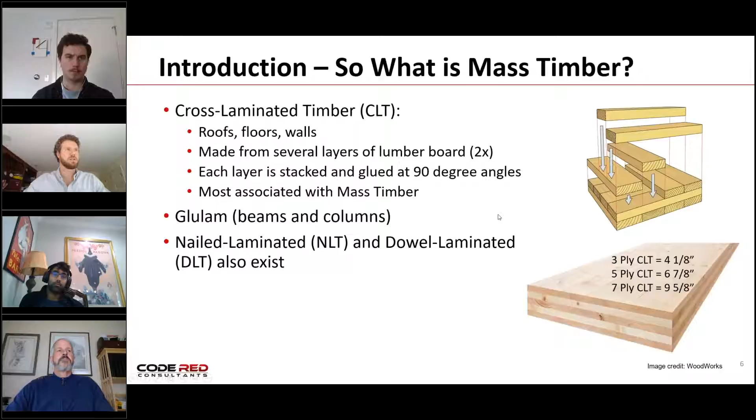NLT floors, I'll mention for the UMass project, but otherwise we're seeing those few and far between, and I haven't seen DLT really used on any project so far.

So sort of in chronological order, and I'll go along with some different construction types. A fun place to start off as an example, not that this is a Code Red project, and it's now been built for the better part of 5 years. I hope some of you have had a chance to go see it, because they do public tours. COVID, I'm not sure exactly what they're doing with COVID. I saw it a couple of years ago, but the Olver building out at UMass, which houses the university's building and construction department, which is pretty cool for them, is a really great building.

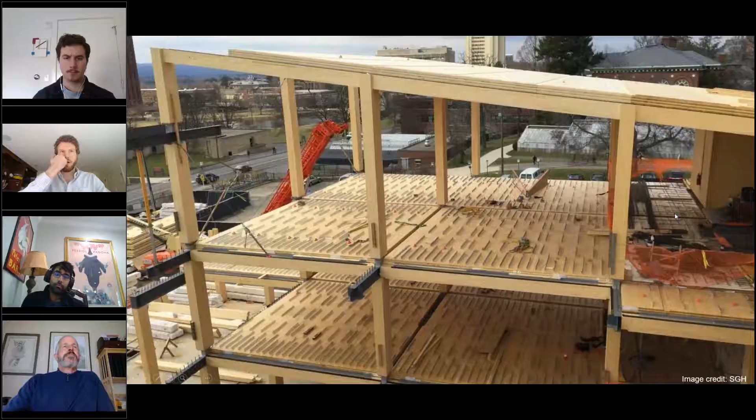This was actually permitted under the 8th edition, and so this has been around for a while. They had to get some specific approvals since they were way ahead of the curve. But it gets called the crown jewel of New England mass timber movement a lot, because it's a pretty spectacular building, and they did a great job with it. You may already know a good amount about it.

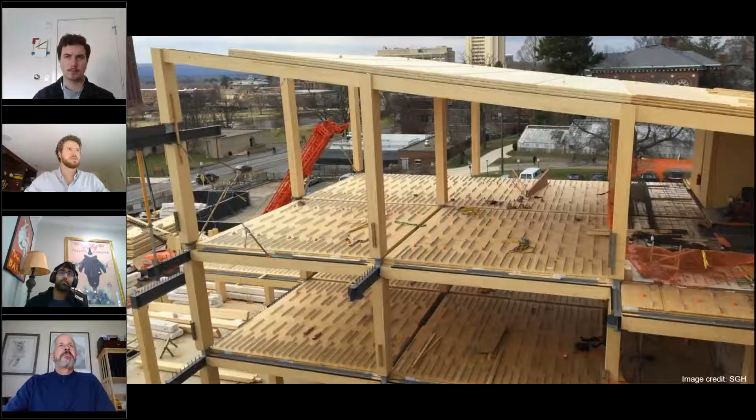I like some of these photos from a construction standpoint, pointing out these big glulam columns. And then the floor system, interestingly, was a proprietary floor system, mass timber, and then concrete, which is what these metal tabs are intending to receive. That does provide some increased fire resistance, but a lot of times, and in this case, it was provided more from an acoustic standpoint, and as I understand, a little bit of a structural design standpoint, to make the floor systems a little bit more robust, with some nice, great big spans between columns, some great aesthetics on the inside, exposed ceilings, exposed beams, columns, some diagonal bracing members, and really a lot of the aesthetics.

When we talk about the drivers of these projects, a lot of it is aesthetic based. If somebody's going to spend the money on a mass timber building, they want to see it. That's one of the things when we talk about the new code provisions that we'll get to, is one of the big things to stay aware of and to keep in mind when people get their hearts set on different ideas and concepts and renderings about mass timber is, when are we going to be able to have the mass timber exposed? And as we start getting taller, how much do we have to cover it up as sort of a penalty for going taller?

Just some other photos from some of the interior elements. You'll note that the steel connections where they occur, and some even of these other steel members, this was a type 4 construction building, which doesn't have any true fire ratings assigned. The mass timber elements just have to meet the minimum dimensions and thicknesses as prescribed in Chapter 6. So these are not protected in this case because there isn't that fire rating requirement. That's some of the stuff that we want to keep track of as we're comparing these construction types to like a type 3A or type 5A, where you might need an hourly rating requirement.

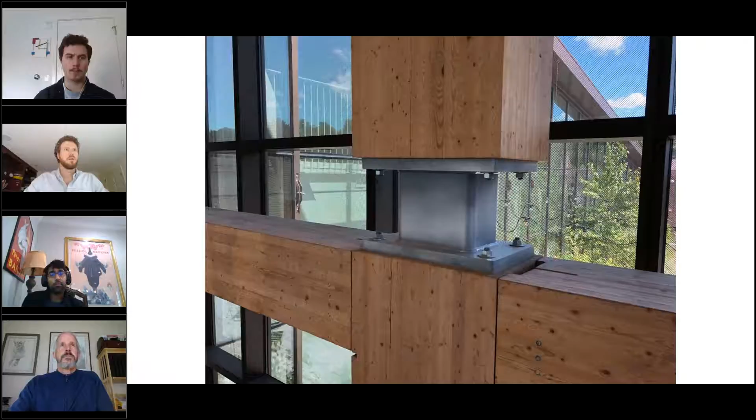One takeaway from this building, as we dive into the technical material, is that it was type 4 construction. When we talk about the current code and the prescriptive allowances for construction types, these are really what it comes down to: type 3, 4, and 5.

Most people default to type 4, and the code certainly crams all the mass timber requirements or provisions into the type 4 definition. But type 3 and type 5 both allow you to use any materials on the interior allowed by code, which now includes CLT and also allows for glulam. So type 3 and type 5 are on the table for mass timber design.

These are the allowable heights and stories to give you a flavor for some typical occupancies and how high you can currently go: assembly, business, and residential. A lot of these buildings are being thought of in terms of residential, just like stick-over-podium buildings might be, but there are certainly approaches to using this for office buildings or mixed use, which is where group A or assembly occupancies could come into play.

If you want to push the current prescriptive limits, type 4 and type 3A are the same as far as number of stories, and those give your maximum allowable heights. You can go one more story for an office building than you can for a group R residential building.

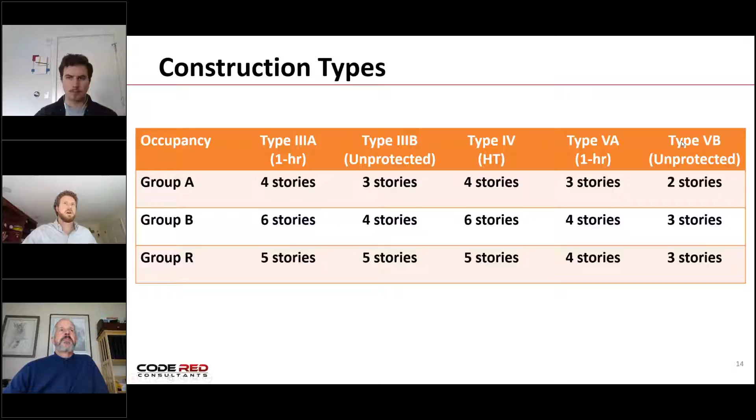And this size and shape of the building allowed us to drive down to type 5B. Based on the table for 5B, we can be up to 3 stories for an office. We don't end up with any hourly ratings, and we don't have to worry about anything in the exterior walls, so there's no reason not to drop down to the lowest allowable construction type for this building.

And again, with such a small 2-story building, this was also allowed to be type 5B construction. Again, some discussions with the local officials, but otherwise nice exposed wood. I show these not because they're terribly complicated from a code standpoint, but just because these are real things that are being designed, built, and occupied as far as what's out there for mass timber opportunities.

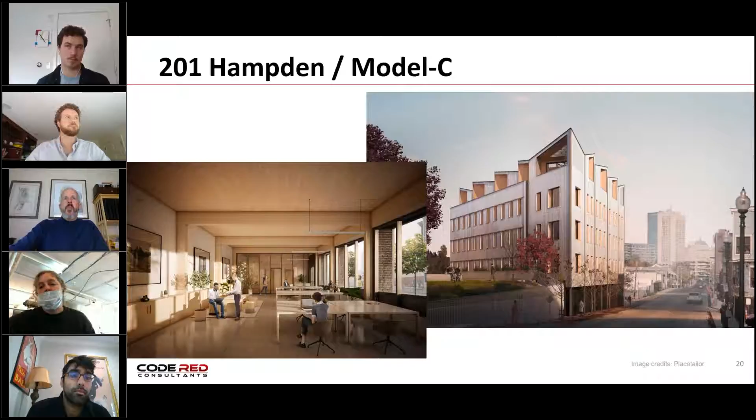When we do get into the fire ratings, and we need to stay aware of it, I just wanted to go through a couple of the mechanisms there. There's generally two ways to approach this. The first is to do calculations to establish what the fire rating is and what the structural design needs to be, and that's mostly through calculating the char of the wood. So this technical report number 10, which is a subset to the NDS, tells you how to do that.

The super general approach, in a nutshell, is to take your charring rate, which is somewhere on the order of 1.5 inches per hour, or 1.8 inches per hour for most wood species, and that gets applied against your required fire rating that you need. So if you need a 1 hour rating, you're probably losing somewhere on the order of 1.5 to 1.8 inches of your floor, say.

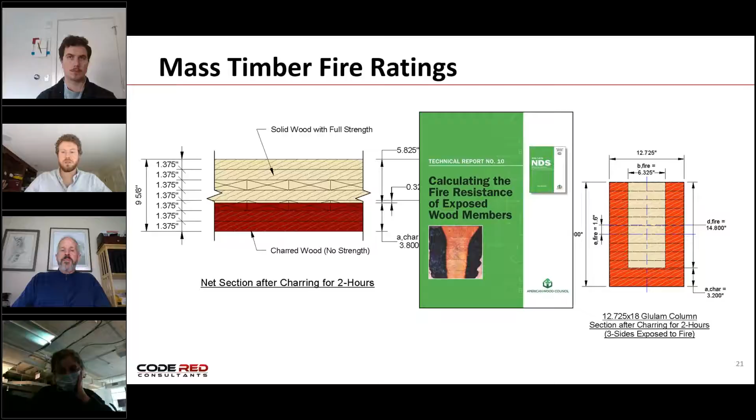So the second option besides calculation is, more and more, we're seeing listings in the UL directory, which we're familiar with from non-mass timber stuff. Whether it's the UL directory listing itself, or test reports that you can get a hold of in many cases that different people are willing to share.

Here's an example of a UL listing, V329. If you're not familiar with UL listings, it's got the number, and some kind of image showing what got tested with callouts. Then as you step through the listing, it tells you what these different callouts are that tie back to whatever rating it gets.

So this is a bearing wall. You can get a 1-hour rating or a 2-hour rating, and here's the table that guides what that would be. If you only need a 1-hour rating and you're okay with adding gyp, then it's just a 1 layer of gyp on both sides. You can drop down to a 3-ply, which is kind of what this represents.

If you need 2 hours, you can go thinner with more gyp, or you can go thicker with less gyp. And then the one that doesn't have any wallboard protection at all in this particular listing will get you a 1-hour rating.

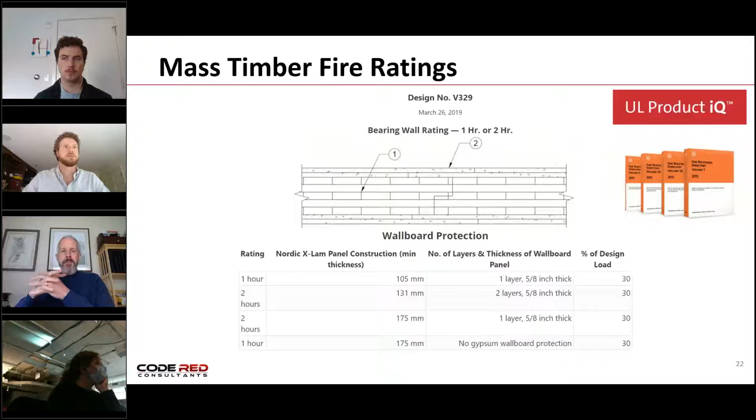To summarize some of the takeaways on the prescriptive side: again, just identifying the minimum allowable construction type, always drive that down as low as you can, because that will help you in the long run. You can have exposed wood in these construction types we've been discussing, as long as you're meeting the fire ratings. Keep in mind the concealed spaces for type 4, and mind the fire rating requirements for type 3A and 5A.

5A, I'm not sure ever really helps, because I feel like you're either going to be going up against as high as you can go, or if you're a lot smaller, like we saw with some of those examples, 5B might be able to get you what you need.

The one other thing I didn't touch on yet: even in type 4 construction, you're going to have fire rated shafts in your building, whether it's stair shaft, elevators, or MEP. As a reminder, the ratings for those shafts are 1 hour if you're 3 stories or less, or if the shaft connects 3 stories or less, and 2 hour if your shaft's connecting 4 stories or more. So those ratings are going to have to be provided.

And then a commonly missed thing is the supporting construction that you need for those shaft ratings. Maybe getting a 1 or 2 hour shaft isn't too big of a deal, and maybe those are self-supporting and you don't have supporting construction. But to the extent that you end up with supporting construction, that load path needs to get chased back down, and the hourly ratings need to be provided in that load path. So that's something else to take care of as you're going through the design for the project.

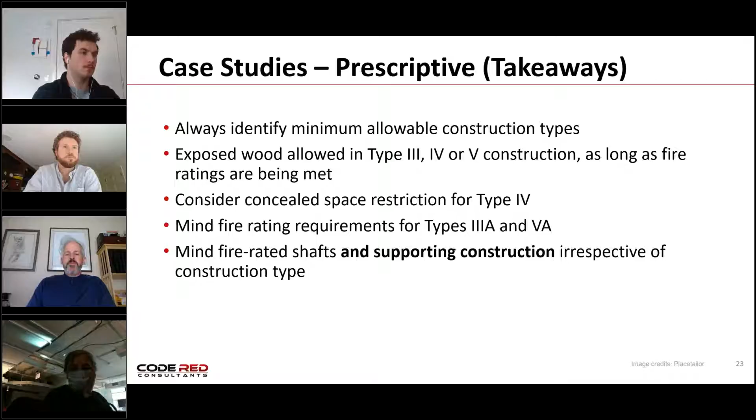Another fun one to start with is the UBC Brock Commons Tallwood House, because this is pretty much the most exemplary mass timber building that we have so far. It's a very cool example of what can be done, and that's exactly why they pursued this project. It was pursued as a showcase and proof of concept to say mass timber is real, the code changes are coming, and we're going to be able to build this stuff tall. They wanted to show North America it can be designed, built quickly, cost effectively, that it stands up and provides a great space.

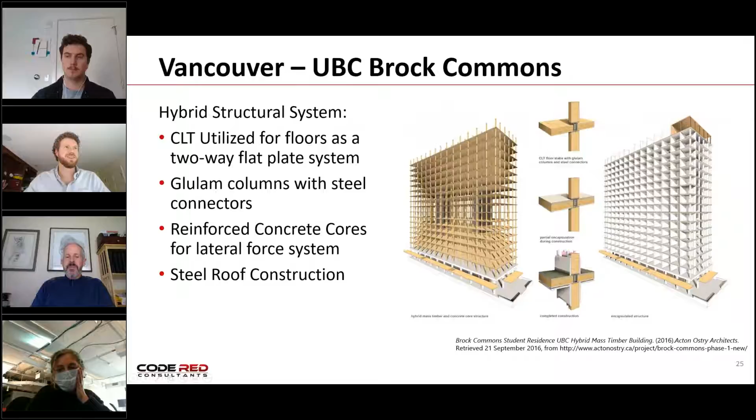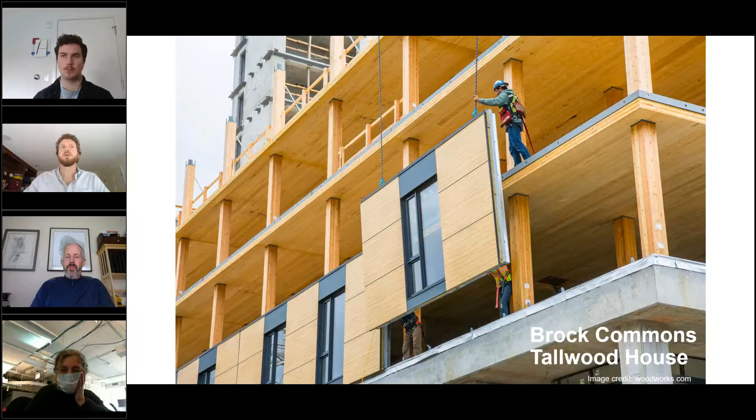More than a picture, something else that's helpful is a video they made available. This is just a quick 2-minute clip I'll throw up because the time lapse is all very interesting. This is an 18-story building, and the first story is concrete. The 17 stories on top are all mass timber, and the mass timber part was done in 66 days, so these things really go up fast, as you can see there, June to August.

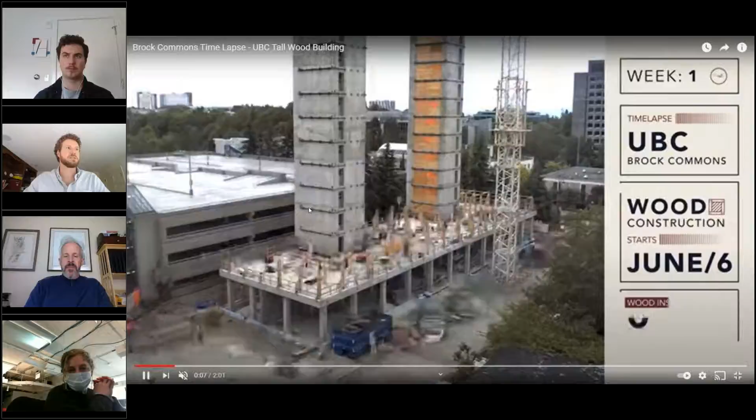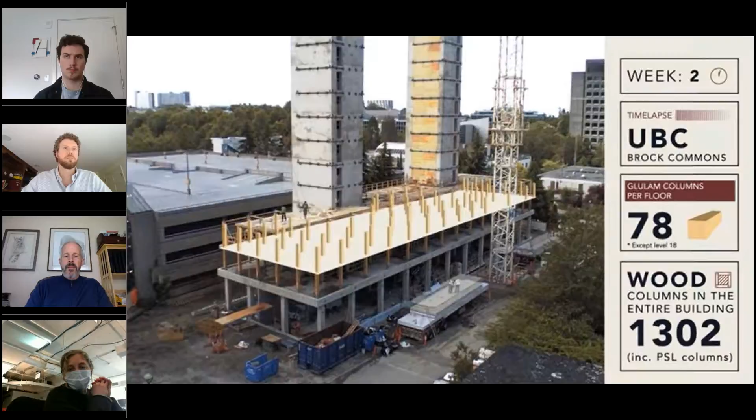Over to the right, they show some infographics on how this came together. They had 9 wood installers on site, 78 columns per floor. As you can see, they're taking the crane, getting the panels in place, 5 to 10 minutes per column. As you go through, the facade is able to chase up the side of the building, and as it says, 2 floors per week. This is pretty impressive.

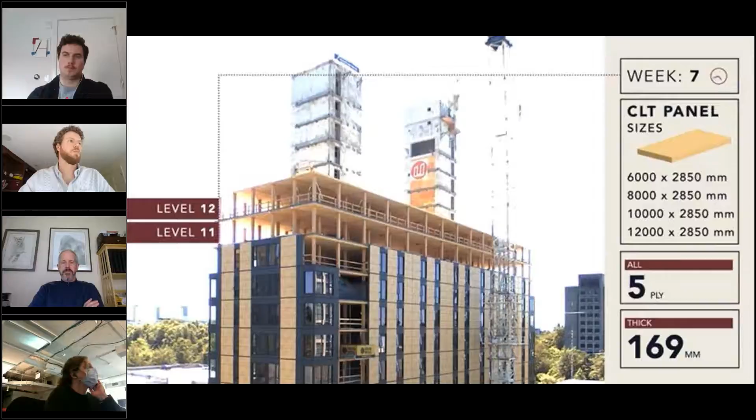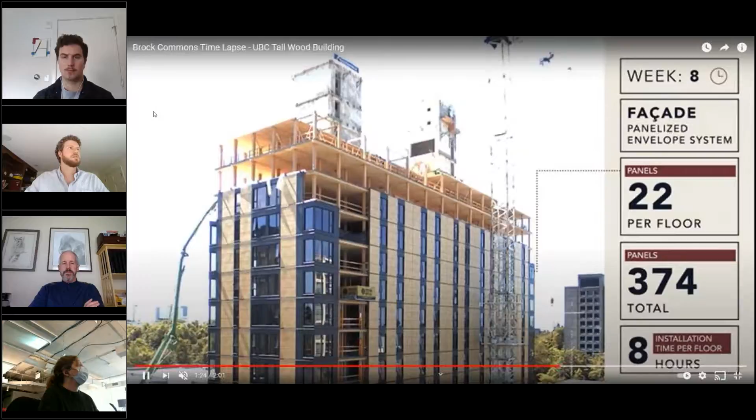You can see some of the equipment coming back to do the floor infill. A question came up recently on what the actual flooring was. I'm not sure if they used a concrete topping or just some kind of gypcrete topping, but they were able to follow up with that and keep going, as you see. Very cool, great speed of construction.

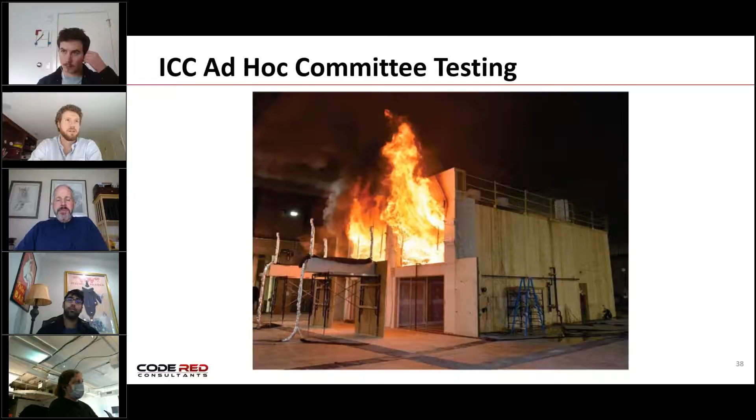They also varied the sprinkler protection that was available. In some cases it turned on right away, in some cases it didn't turn on at all, and in some cases they delayed it for 20 minutes just to show that even with some relatively involved fires, the CLT panels do have the fire resistance that gets calculated, and there ends up being burnout.

So these are the new construction types, and as you can see, the height compared to what we were looking at before is way higher.

So the 2021 IBC now adds type 4A, 4B, and 4C to table 601 and in the definitions of chapter 6, as 3 brand new construction types. These are the first new construction types we've seen in a long, long time in codes in general, but certainly since the IBC was formed in 2000. So this is pretty cool for the industry.

Type 4HT also remains in the code and stays the same as what we know of type 4 today.

The differences in the construction types besides the heights you're able to get, which is shown here, is what you have to do to protect these kinds of buildings. As stated at the bottom, all of these have a 2-hour rating requirement as a structural rating requirement, so these are all going to be the equivalent of something like type 1B construction in the current code.

And based on the heights, that's basically what they were trying to equate it to. All the way up for type 4A, you also have 3-hour columns like you would find in a type 1A building. The other difference though is how much of the CLT and mass timber is able to be exposed. As we go right to left, it gets more onerous as you get taller.

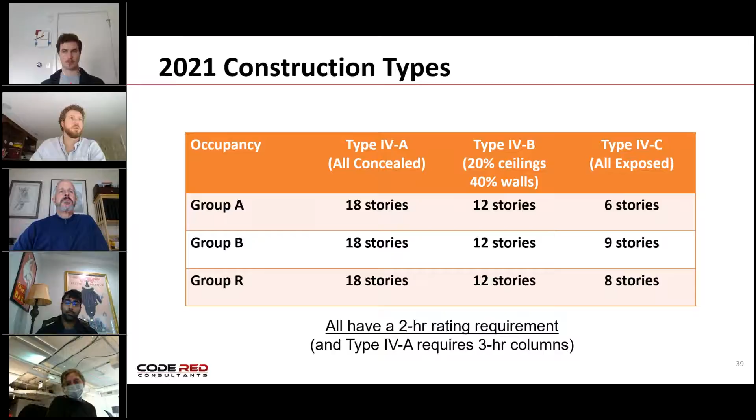When it comes to type 4B and how that's going to work, you can either have 20% of your ceilings be exposed or 40% of your walls be exposed. That's based on the floor area of a fire separated compartment. So if you're dealing with residential, each residential unit has like a 1 hour boundary, you'd take the floor area of that unit, and it's a percentage of the floor area we're talking about when we say how to do this.

If you want some mix between the two, there's a ratio calculation you do, like the one for mixed use occupancies, where you take the total for the ceiling over the allowable for the ceiling, plus the total for the wall over the allowable for the wall, and that has to stay less than 1. That's summarized in the bottom 3 bullets here.

You can either have all ceiling exposure, for example 200 square feet in a 1,000 square foot apartment with no wall exposure, or 400 square feet of wall exposed with no ceilings, or some mix of the two. In this case, 150 square feet of ceiling and 100 square feet of walls works out to a ratio of 1 if you're mixing and matching.

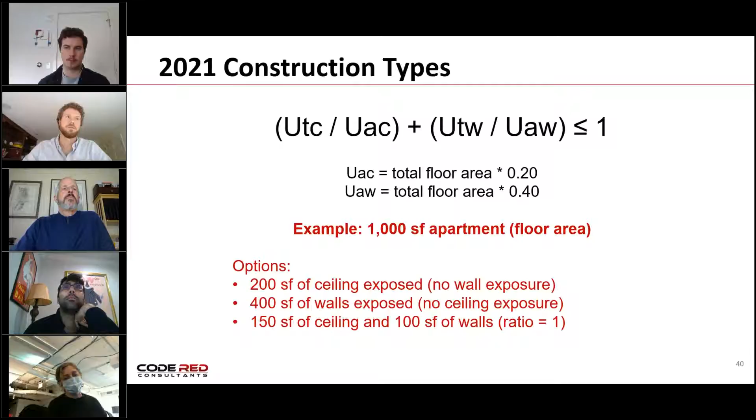A lot of times the walls aren't really getting exposed, and people are going for the ceiling exposure instead. Since this applies to the entire residential unit, designers often congregate all of it in the living spaces, keeping bedrooms, bathrooms, and hallways as regular ceiling, and putting the whole 20% allowance in the living room or kitchen where it's more visible as you come in, as a strategy.

But that's how those new construction types are working, as far as how they're being applied and what we're seeing. Again, some of these buildings are more out west, but I'm sure you've heard of the T3 building in Minnesota at this point, something like 7 stories. Portland's been doing like 8 and 12 stories.

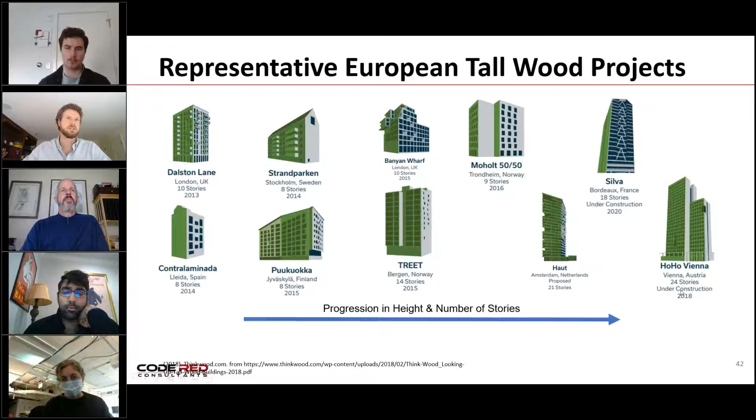You see a lot of stuff in Europe pushing 8, 10, 14, 21, 24 stories. Those are getting a lot taller, since they've been doing that there for a little bit longer than we have here. Up in Canada, Brock Commons, which we discussed, is still pushing the limit, or is still kind of the leader in what's being done now. At the very end, I'll mention a couple US projects that are ongoing, but that's what we're chasing.

As that relates to how we're starting to push the boundaries locally, both of these case studies I'll mention are greater Boston area projects. They both are above the prescriptive allowances, and we had to chase variances for both of them. Those variances were both approved very recently, so that's some great data points that we're gathering.

This first one is a 7-story apartment building in Lower Roxbury. The design wanted CLT floors and roof, glulam beams and columns. This ended up doing concrete cores.

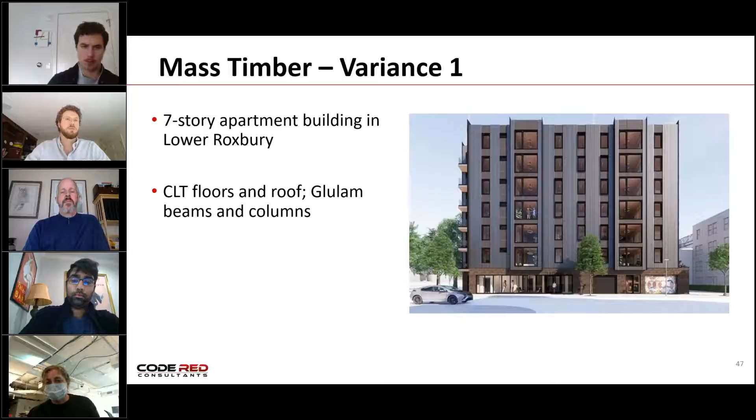So compared to what we'd otherwise be allowed to do, the 9th edition restricts us for type 4 construction, which this project chose to go down for a couple different reasons. We'd again be limited to 5 stories, as I mentioned earlier, for a group R building. 2021 for group R would allow up to 8 stories under type 4C, and everything would still be allowed to be exposed.

So where that leaves us within the 9th edition is that we chose to request 2 additional stories in height as our variance ask - 7 stories as opposed to the allowable 5 within a 9th edition type 4 building.

Some of the reasoning was that the team thought in this particular case that staying within the type 4 lane might make the most sense to the board, since that's where it all gets documented in the code. The proposal was to include 2-hour structure, like would be required for type 4C, and then a limit to the amount of concealed spaces provided, somewhere on the order of 15 or 20% of the floor area. That was what was pitched.

We were careful not to say that we were going to comply with the 10th edition, as much as noting that the 2021 IBC and the upcoming 10th edition will allow this, and so we're asking for it in the spirit of the 10th. We don't know what the 10th edition is yet, we don't know what the amendments are, they haven't even been proposed or drafted. So for now, variances need to stay within the 9th as much as possible, with some supporting justification alluding to what's coming down the pike. But we can't blindly commit to the 10th edition yet until we know more of what's going to be proposed, and those amendments are at least in final draft form.

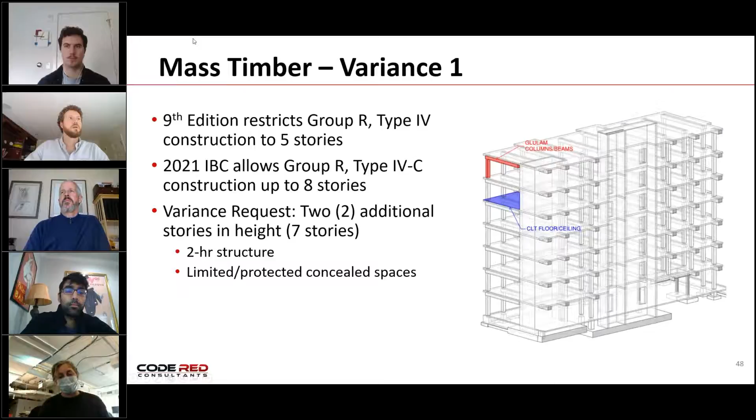So that was one example, a Type 4 that asked for 2 additional stories. Another example is even taller, and it's not residential. This is office, 8 stories, roughly 350,000 gross square feet.

Both of these projects are high-rise. They are over 75 feet in height, and they knew that going in, so they have all the bells and whistles that a high-rise requires. This one including pressurized stairs.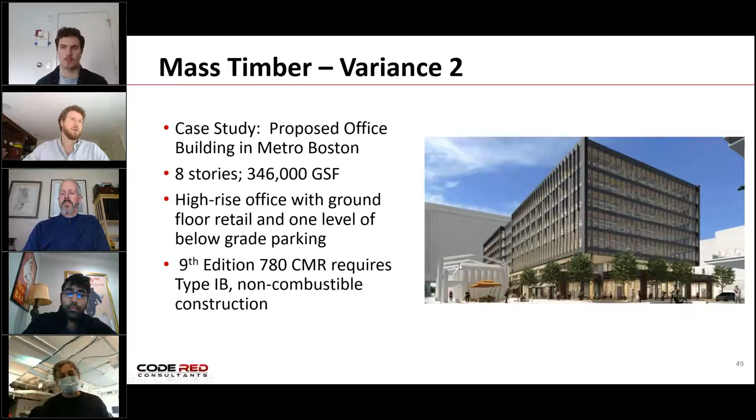So this one took a different tack, though, where the 9th edition here would otherwise require Type 1B construction, and that would have to be non-combustible. The ask here was very different.

In this case, we said that we're going to be a Type 1B building. The only mass timber elements proposed were the columns and beams. The floors, the walls, everything else, the roof, was all non-combustible construction. So the ask here was, we want to be a Type 1B building. We're going to maintain our 2-hour rating, but our structure in the columns and beams is going to be a combustible element as opposed to a non-combustible element.

But we're still going to get the 2-hour fire rating. We did a little bit extra on the sprinkler protection side to make up for that. But otherwise, the structure's 2 hours. You're getting the 2 hours, whether it's a wood column or beam, or whether it's steel with fireproofing. And so we feel this is a legitimate ask.

The justification also brought in the concept of the 2021 code, although in this case there was assembly near the top of the building. So again, we had to be careful with saying purely that it complied with 2021 IBC, because I think it was going to be a little bit more in the Type 4B range. They wanted the columns and beams to be exposed in this case, but it was pitched this way and it was granted.

And so here's another successful data point that we now have, with basically a toolkit, right? Somebody's going to go first, somebody's going to ask the board these things, then you start to develop a little bit of precedent as you continue to move forward.

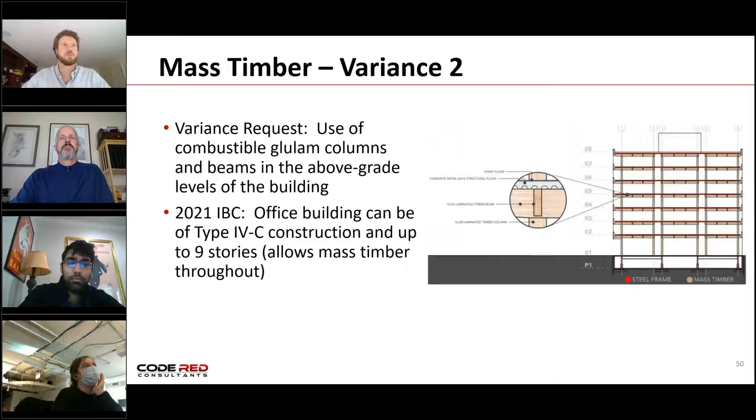So we were a little bit hesitant to use a totally different approach, but it's what needed to be done. And now that it's been approved, we know where we can start to push the boundaries, and there are other projects that will continue to do the same thing.

Along with both of these projects and some of the taller buildings, and even just fire ratings present in these mass timber buildings in general, some other things are popping up that I wanted to quickly mention. Not all of them have actual solutions yet, but these are things we want to stay aware of early in the projects. They're related to fire testing and fire rated elements that we've mostly solved for traditional construction, but they're presenting new challenges for mass timber.

Things like fire rated joint systems. If you have a CLT wall that meets a CLT floor, the head of wall joint that needs to be rated is almost always up against a gypsum ceiling of some kind. That's not really going anywhere. If you have an exposed CLT ceiling that's going to burn away and char, what is that detail? What kind of intumescent sealant do you need? And how many listings are there, if any, so far that Hilti or STI or 3M or whoever has run?

For other projects, that's pulling, either flipping open the UL book to something that's going to be there anyway, and it's just a matter of finding the right one, or going back to your stable of pre-approved joint details that you always use and used on the last project or something like that. And because of the nature of that, a lot of times that's happening right before permit, or somewhere in CDs, because it's just a matter of putting your fingers on it.

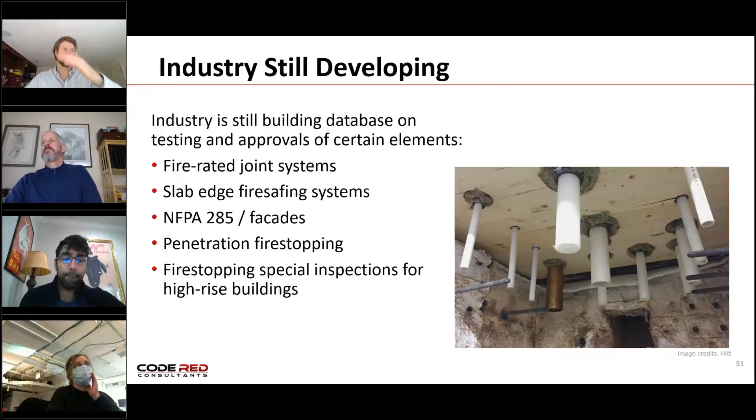So again, all project specific solutions, but just as far as sharing what we're seeing and things for you to keep in mind as you're working through the design and things to stay aware of.

I'll conclude and try to leave a little bit of time here for Q&A and discussion. But a couple other cool projects that are in construction right now I just wanted to share quickly. This is in Cleveland, called the Intro Building by Harbor Bay. It's a 9-story residential building under construction now, and they're delivering it for spring 2022. So again, this stuff is real. This is what's being done, and this is what's coming.

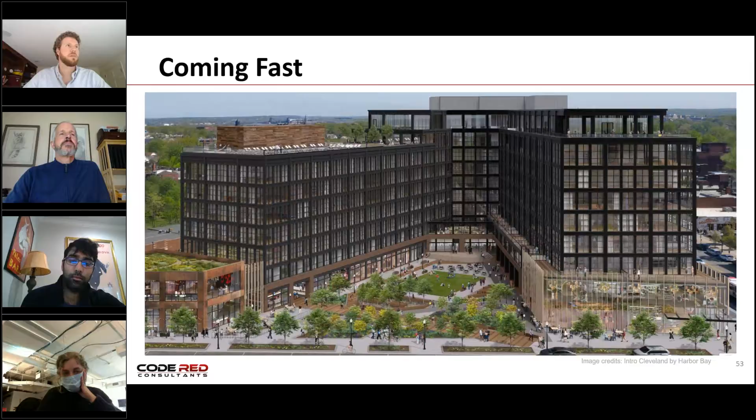There's a lot of support for these buildings in some of these areas from the local timber associations, timber industries, state governments, that kind of stuff. So there's funding that they're getting, and these places in some ways want to be first to the table and be able to brag about what they're building and how high they're going, and the fact that, hey, we can do this. So all stuff that continues to be great for the industry, and I assume for all of you who are interested in mass timber, interesting data points and project examples to see what's going on in other places.

So with that is the content and knowledge that I have to share. I'm sure there could be several questions and/or comments back, and I am happy to talk about whatever is on your minds as I went through all that.

Awesome, thank you, Brian. Yeah, Anish, what do you think? Was this the kind of stuff you were hoping for and expecting for content? Are there areas that you were hoping to hear about that I didn't hit on?